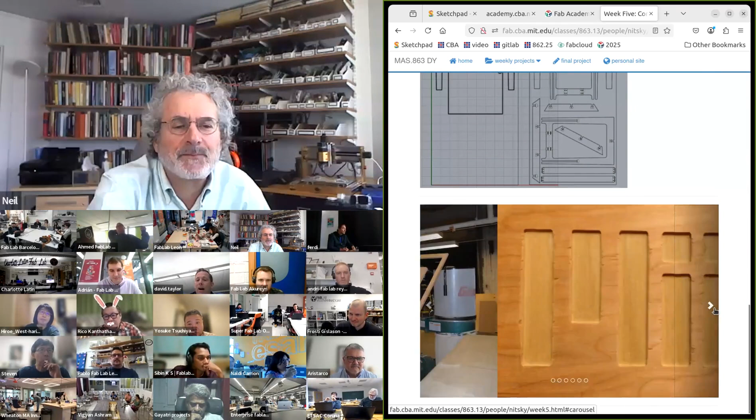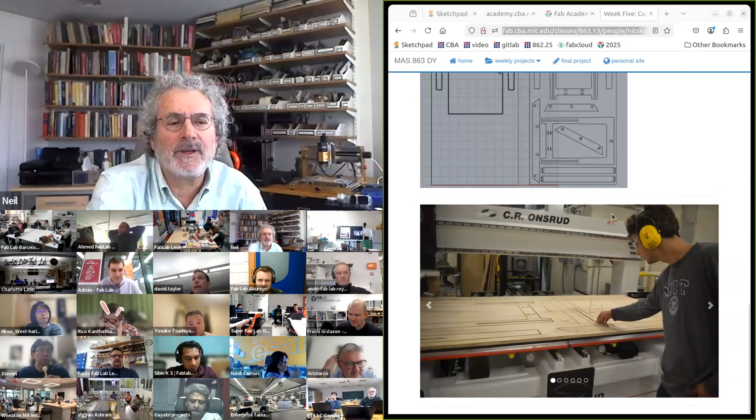so his girlfriend wanted a standing desk, and here she is with it. And let's see, I'll update that link. But this is a classic assignment for the week, starting from the sheet stock and cutting out all the parts to make the desk. This is nicer wood than you'll likely start with. But that's one example.

In that lineage, Open Desk is a platform for open furniture. Here are lots of examples. AtFab is another platform. So those are examples of furniture, and then it can get bigger. So this is a project making rapid shelter for things like emergencies. This is a project a colleague made using the tool you're likely to be using to make a whole house for the Museum of Modern Art.

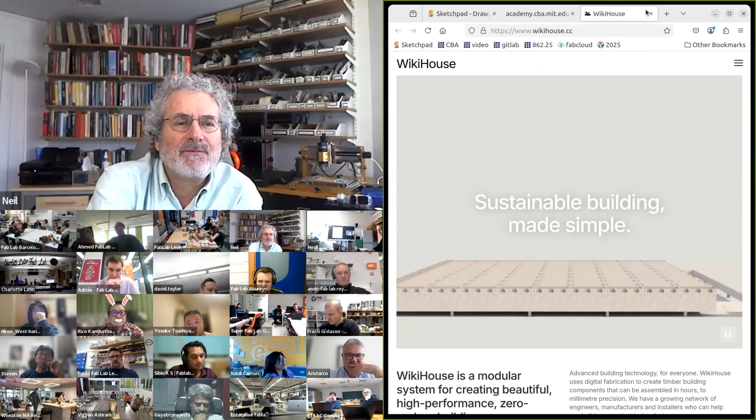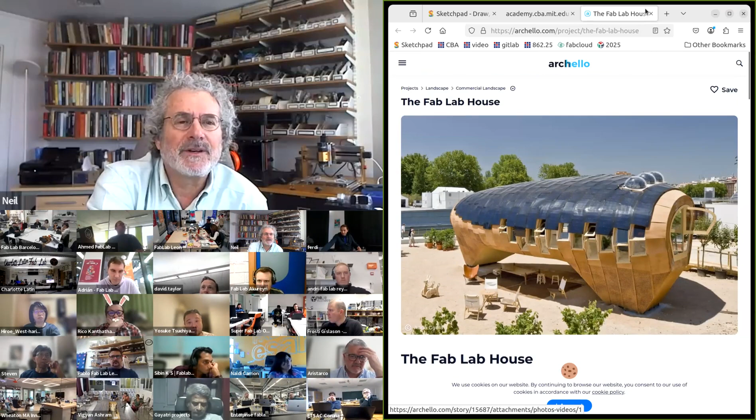WikiHouse is using these tools to make full-scale houses this way. This was a small house made as a Fab Lab project. And then this was the biggest Fab Lab project ever. This is a full-size house made, including all the furniture in it, all using the skills we're going to cover this week. So you won't be able to make a house this week, likely. Well, maybe a tiny house, but it's just using more of the skills we're covering. So start with the tools. On the smallest size, this is a machine made by a former student.

And a router cuts out 2D shapes, but this has computer vision, and so you do the coarse motion and it does the fine motion. This isn't good for making giant things because your arms can't reach, but it's good for making fine parts.

And in particular, what's great about the Shaper is with all the other tools, you bring your stock to the tool. With the Shaper, you can bring your Shaper to the stock. So you can engrave in a floor. You can bring the tool to wherever it's needed. So that's the smallest tool.

Maslow is an interesting offshoot. This, instead of having a big gantry, has tendons. And so you have anchor points, and then the tendons pull this head around. So instead of a giant machine, you anchor it on the stock.

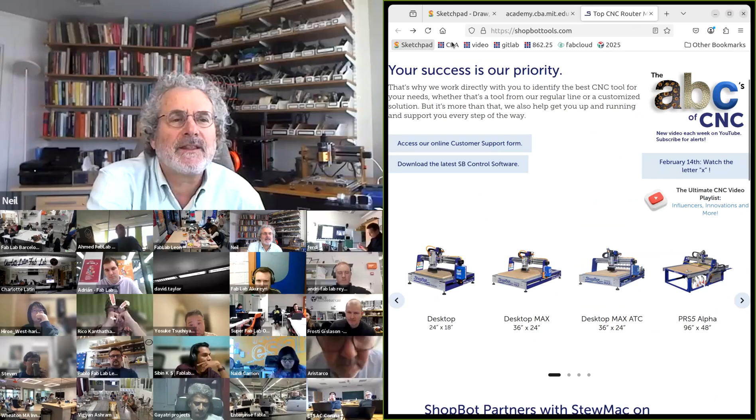And then the classic machine for this week is a ShopBot. This was founded by a colleague who works very closely with the Fab Lab network. And so a classic ShopBot is 4 feet by 8 feet. They can be both open and closed loop, and I'll talk about that. And so these are in the range of $20,000 to $30,000. And they're fairly stiff, but they're bolted together, so you have to periodically readjust it.

Then a machine like this, the Onsrud, this goes from $20,000 or $30,000 to, let's see, their site's not loading, but $100,000. And the difference between the ShopBot and the Onsrud is they can basically do the same thing. The Onsrud is much stiffer, and so you can machine more aggressively and more continuously, and you don't need to periodically readjust it.

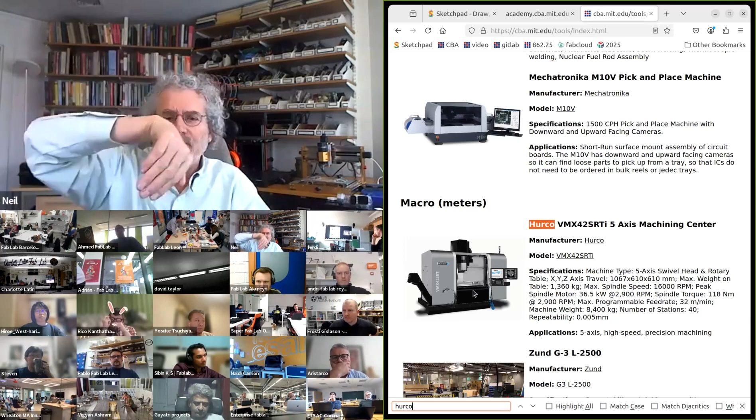Then there are tools like Haas or Hurco. And so, let's see, this is a machine tool in my shop. This cost about $300,000. And it has a fairly large work volume. It can move in 5 degrees of freedom. So it moves X, Y, Z. The bed can rotate and then the head can rotate.

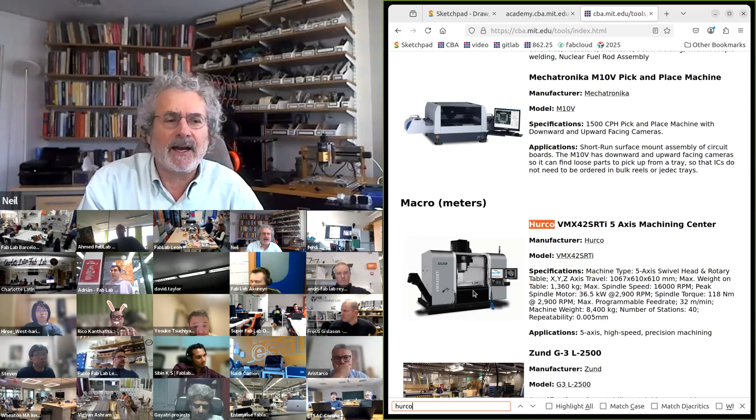But this is much, much stiffer. So the ShopBot can do light metal like aluminum or brass. The Hurco can do titanium and stainless steel at high speed. But you need a much stiffer machine and a much heftier spindle.

Then while we're touring machines, the Zund like this, that came up today at the Kerala Fab Lab. The Zund, depending on the model, is maybe $100,000. And so it's got a very high-speed machining spindle that's very accurate, that it's laser trimmed. But what makes this one special is there's a moving vacuum bed.

And so you can work over a large area quickly, and you can machine, and you can also cut with heads that roll or punch or shear or cut. And so this is used for high-end advertising displays, for race car composites, for luxury leather goods, or all sorts of unusual uses of this giant flatbed cutter.

And then a really interesting machine you'll hear about in the machine building recitation is Jens in Norway has been making machines that are, let's see, we want to go to the Humphrey. This is a machine on the scale of the primary machine for this week, but this is an open design made in the lab, and in particular, most of the parts of the machine are made on the machine. And so he's made a series of a parent machine, a child machine, and a grandchild machine.

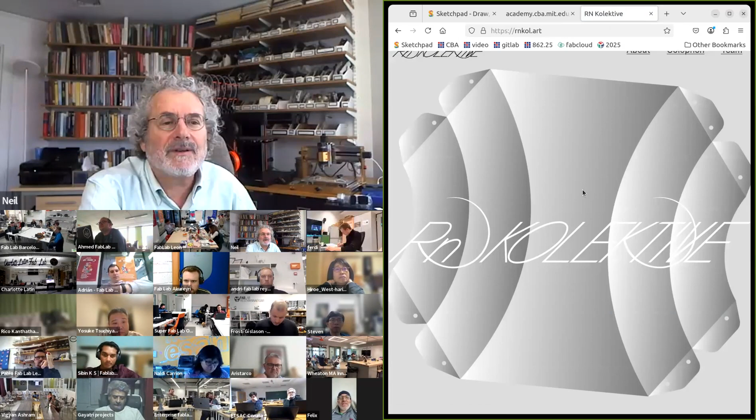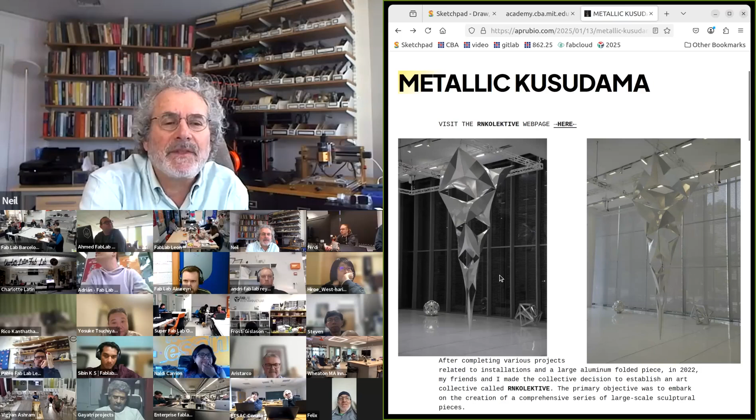Let me take a look quickly to see if I can find it. Oh, great, I found it, and I'll add a link to this. So, one of my students, let's see, that's not loading properly. So let's go back to here. So these are art pieces, the size. Okay, oh great. This is the picture I wanted.

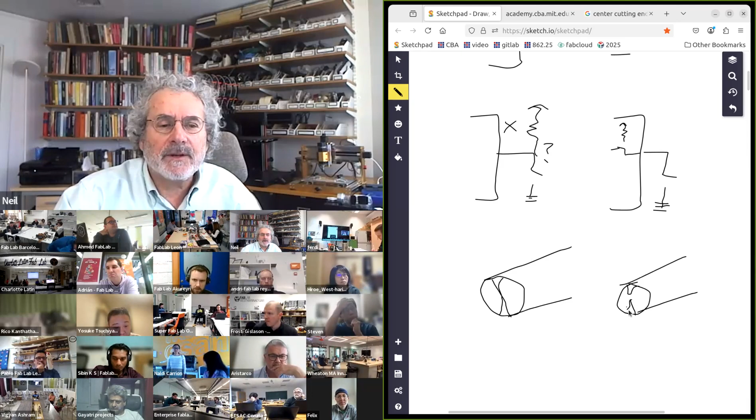Then the next distinction is, if you look at the tip of the end mill, if you look at the front of the end mill, actually, yeah, this is a good image. Actually, that's a little confusing. So if this is our end mill, and then we have the flutes, there's 2 different kinds. In one kind, they don't meet at the middle. The other kind, they meet at the middle. This kind is called center cutting because you can go down as well as over.

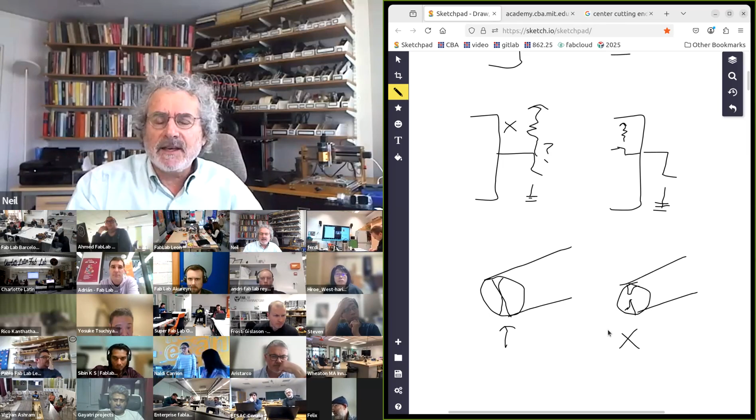This kind is not center cutting, and so you can't plunge with it. I'll talk about how you use it when I get to the toolpath. Non-center cutting does a better job of removing chips, which is why they exist. Center cutting lets you plunge. And so typically we are always using center cutting end mills. Yeah, Ricardo is noting there is a matrix of which coating works with what material, which is why there's multiple coatings.

The next thing you need to pick is up versus down cut. So here's a sheet of plywood. If you're milling with the end mill, and if the spirals are going this way, when the tool turns this way, it's trying to lift up the top, and so you pull up an edge on the material. If instead the flutes are going this way, here's the end mill turning, this is pushing down, and so you get a clean surface on the top. But the problem is there's nowhere for the chips to go. You're kind of pushing them into it.

It's the opposite at the bottom. This one at the bottom gives you a clean surface. This one at the bottom will be ripping the surface out. So a common thing to do is you can start with a shallow cut with a down cut end mill. And then once you have that, you finish it with an upcut end mill.

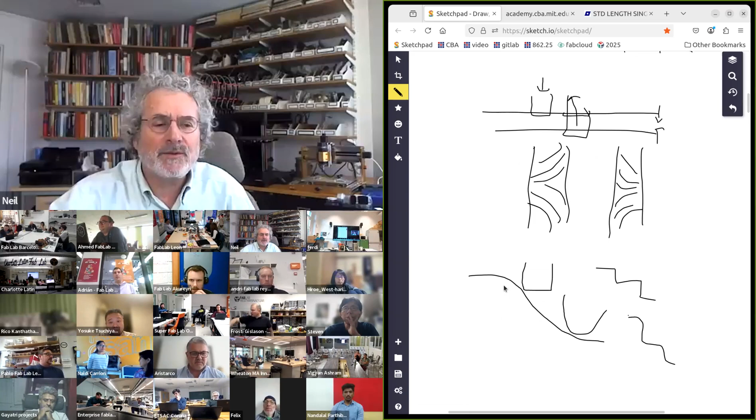But a more important difference is if you need to get into a pocket, the flat end mill might hit the edges where the ball end mill can get in. And so ball end mills tend to get used for finishing cuts for smooth surfaces and getting in for finer features. And then in addition, there are a number of other specialties like extra long end mills that can get into a narrow pocket, but these you have to go very slowly because they bend easily.

And then there are tapered end mills that can make a fine end cut, but are stiffer. There's tiny end mills for the littlest features. And so there's a huge range of tools. And so part of this week is going to be picking out the tooling. Yeah, so the flat, sorry, Stephen, what's the question? A flat bottom end mill is best at making flat surfaces and at chip removal.

So a big part of this week, one part is picking the tooling. Then the next task for this week is what's called speeds and feeds. So this is a Bible of machining called the Machinery's Handbook. And let's see, another site loading slowly. Hopefully that'll load. This is a handy book you should have in your lab by your machine tool. That's a really good reference.

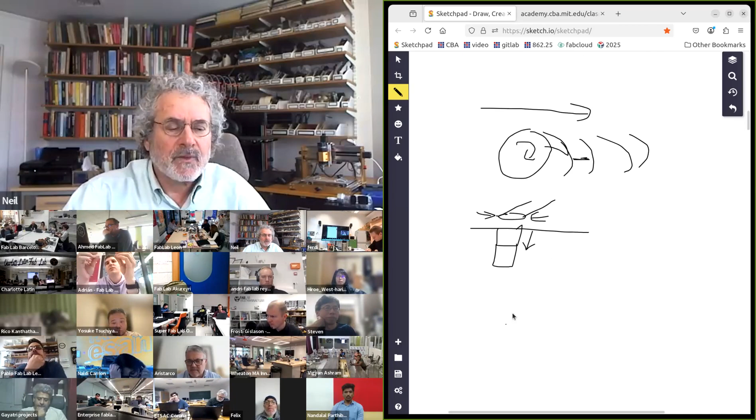Then the step over is, let's say this is the edge we want. If the tool goes on this path, and then the next one goes on this path, from the side view you'll get a little bump at the boundary between them. And so the step over is how much you overlap succeeding passes. And it can range from 0 for rough cutting to 90% for very smooth finish cutting.

Lubricants, you're not likely to use this week. So when you machine stainless steel at high speed, there's typically a lubricant, and it's doing two things. One is it's helping lubricate the tool, helping it move. The other thing is it's helping remove heat from cutting. You don't use lubricants with wood. You don't typically use them with plastic. And for light metal machining, you don't need them. But for heavy metal machining, you use lubricants.

Then an interesting thing you can do is, this is abrasive grains. You can use them in a slurry to machine hard material. And then you can get, again thanks to our friends in Shenzhen, these surprisingly affordable diamond impregnated bits. And these cut hard materials, not by a flute making a chip, but by grinding away little tiny particles.

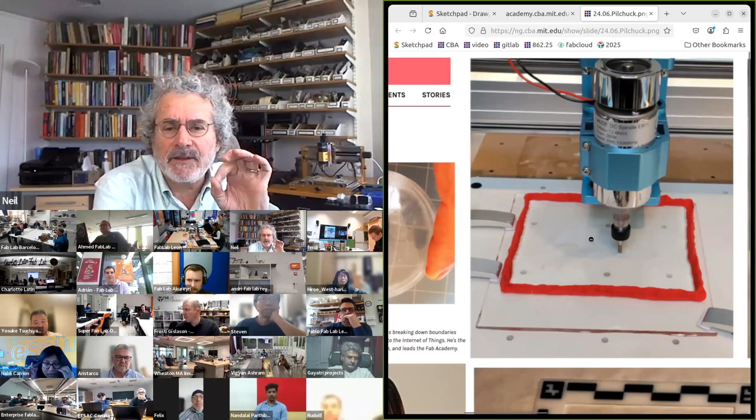And the reason it's there is when you use the diamond bit, you need to cool it, but also the fine particles are hazardous to breathe. And so here the puddle suppresses the particles made by the grinding. And what we're doing there is we're actually plotting in glass. We're machining 3D surfaces in glass that you can't do with an end mill, but you can do by machining with a grinding bit.

Okay. Next comes fixturing, and this is surprisingly non-trivial. So if you want to buy a vise, not a visa, a vise, a simple bench vise might be $10 or $20. But if you want to buy an NC machining vise, let's see, an NC machining vise might be $1,000. And so the $1,000 vise, compared to the cheaper vise, has much flatter surfaces that are smooth, flat, rectilinear, stiff. Oh, okay, yeah, toolmaker vise.

So for precision machining, you can use a machining vise. For simple machining on a large format tool, you can use bar clamps. So these are just handy clamps to clamp it down. But you can't use those for big areas, because if you use a bar clamp and you clamp it at the ends, nothing is holding it in the middle when you machine. And so you need to distribute the holding force.

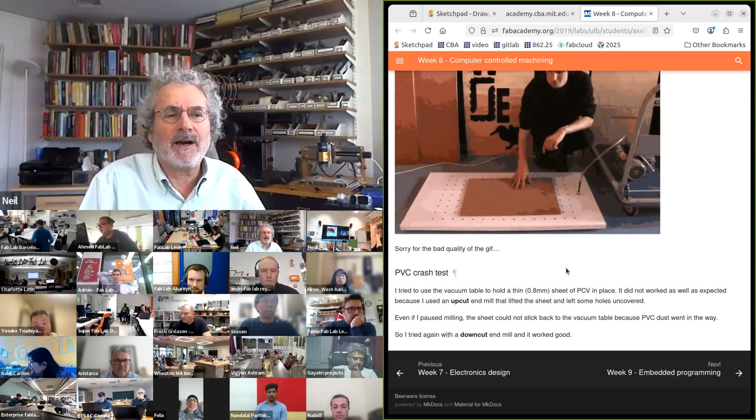You can use a vacuum bed. This is a project where somebody made his own vacuum bed. And so here the vacuum holds it down. In a job shop in production, vacuum beds are preferred because it's much quicker to get the material in and out. The only limitation is they need some maintenance. The holes get plugged, so periodically you need to do maintenance on the holes in your bed. But production tools use vacuum beds to distribute the holding.

When you machine wax to make molds, often we use a bead of a glue gun to hold it, and then you just crack that to take it off. And for the most complex machining, where you're going to machine with all 5 axes, one of the interesting ways is you take a piece of metal you want to machine, then take a low temp metal that's kind of like solder, and you cast your metal in the low temp metal. You put that all in your machine, machine through both, and then melt away the low temp material to take your part out. So there are a lot of options for how you fixture. But typically we use screws or these sacrificial nails to distribute the hold down.

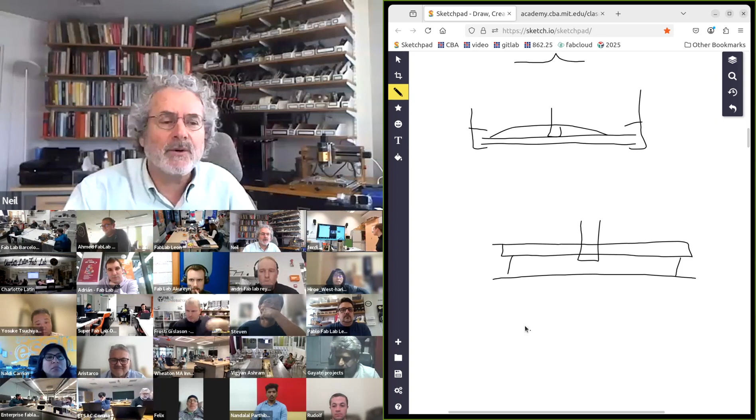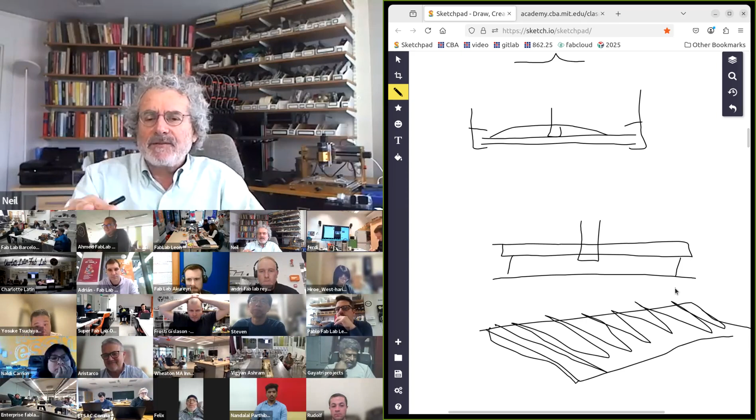So next up is, what does the nail go into? You have the bed of your machine. You have your stock, which is going to be machined and turned into a piece of furniture. In between those is a sacrificial layer, and you cut into the sacrificial layer. So if this is your large machine, periodically you put the sacrificial layer on it, and then you run a long job where you go back and forth and machine the whole sheet. You want the sacrificial layer to be flat in the coordinate system of the machine. So you machine the sacrificial layer smooth and flat, and then use that to hold down your sheet. Depending on how often your machine is used, somewhere between months and years, you replace the sacrificial layer when it's used up.

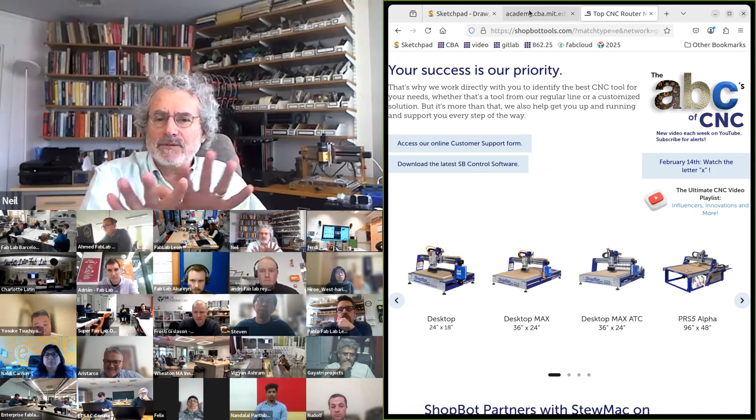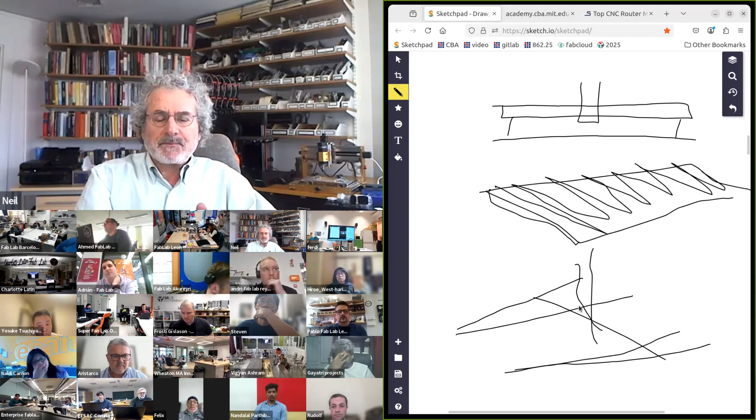Then the other thing is, if you look at a tool like a ShopBot, it's bolted together, and over time the bolts drift a little bit. So to exaggerate, we have the rails on the side of the machine that the carriage travels on, but they might not be parallel. They might be converging or diverging. And we have the vertical axis of the machine, but it might not be quite vertical. What that means is when you cut out a square part, it might not be quite square. So periodically you need to run a test job, make a test part, and check that when you send a square part in, it comes out square and the dimensions are right.

Then when you're machining, you're making a lot of dust, and I'm going to talk about that for safety. You need to collect it. And so there's a boot on the machine that's vacuuming up the dust, taking it to a dust collector. It's noisy. You typically want ear protection.

If you see dust coating surfaces in your lab, it's a very bad sign. You don't want to be breathing it. You don't want to distribute it through the lab. When everything is working properly, the dust goes into the dust collector. If you see dust not getting collected, something's wrong, you need to address it.

So then one of the questions in the chat, this is now the answer to it. You're going to start with a flat piece of wood. This is called a flexure, where you make lots of little beams, each that can bend a little bit. And by doing that, you can start with a rigid flat piece of wood, but make something that bends. And your ability to do that does depend on the quality of the wood. These aren't great in OSB because it's chunky. This works better with smoother veneer wood.

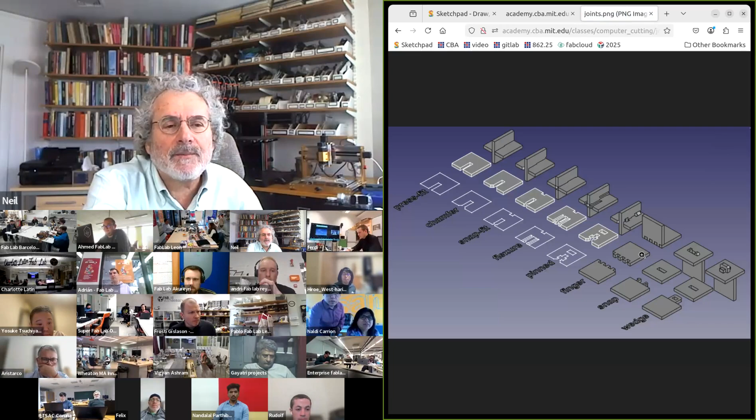This is a poster of types of joinery. And so in laser cutting, I showed you a few kinds of joints. In woodworking, again, there are hundreds of types of joints. If we go back to the laser cutting week, one of the nicest joints for this week is the wedge joint. So this last example here,

a wedge joint like this, the reason this is such a handy joint is you have the part that goes through, you put in the wedge, and you don't need to get the dimension right. You don't need to know exactly the thickness of your stock, because if it's a little thicker or a little thinner, the wedge will go in a little more or a little less. A wedge joint is a really nice way to handle the range of types of joints.

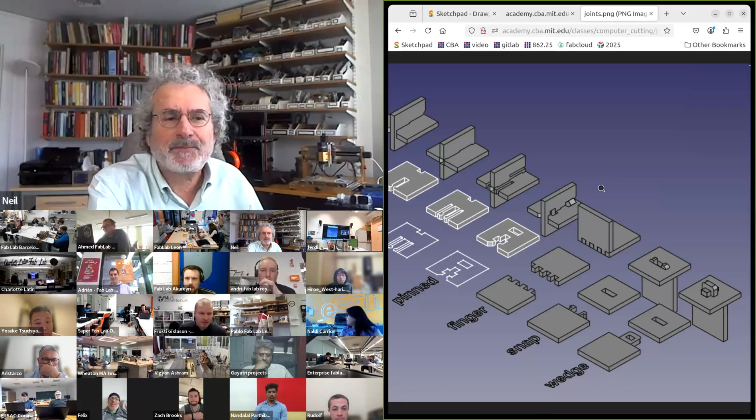Then once you have a joint type, there's a huge range of things you can do. So reciprocal frame construction is a joinery strategy where you take the joints and then you make these sort of structures out of them. These are called reciprocal frames.

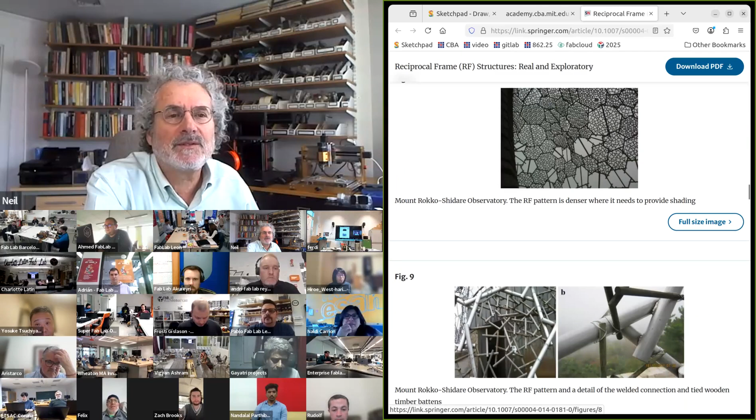Tensegrity is a really interesting idea where you have strings that are good in tension, you have beams that are good in compression, and there's no flexion, there's no bending. It's all a combination of tension and compression. And you can make what look like beautiful floating structures with tensegrity.

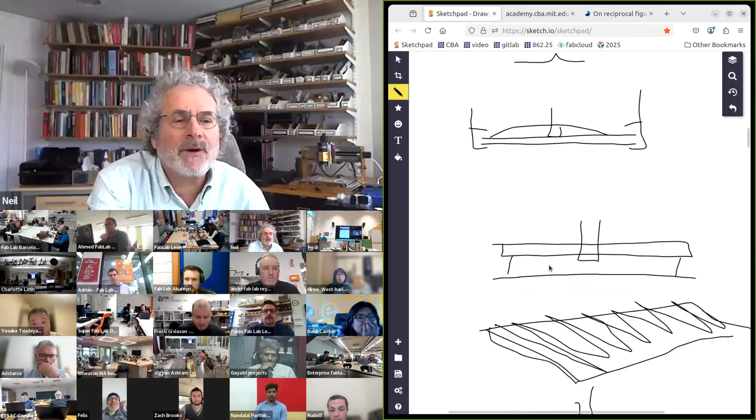And then the Maxwell criterion, this is a classic paper from 1870. And it's an important thing to be aware of this week. If you make, say, a bookcase, and this is the bookcase, it'll be very wobbly because it can shear like that. So instead, in the bookcase, you typically have a reinforcement like that.

And what's going on is you need to count how many degrees of freedom there are and how many constraints there are. And if there are more degrees of freedom than constraints, it's a mechanism and it can move. And so you need to add constraints so that you don't make a wobbly structure. And so that's called the Maxwell criterion.

Okay, so now we have our machine, we have our stock, we have our tooling, we have our fixturing. Now we need to make a toolpath. So, terms: we've already seen kerf, the idea that the tool has a diameter, and so we need to offset by the tool diameter to get the right shape.

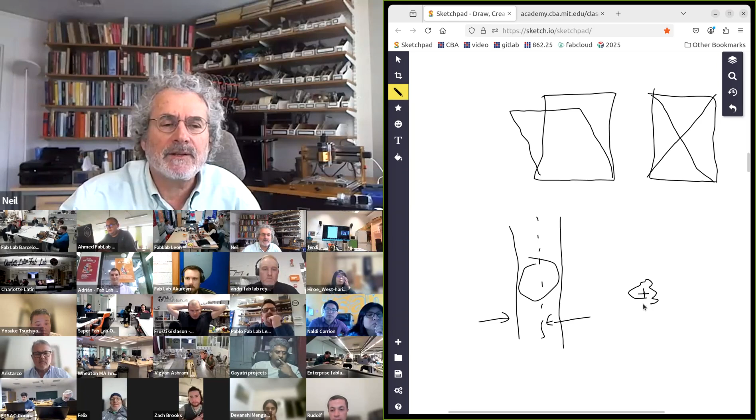In addition, another important concept for this week is runout. Runout is because the tool might not be perfectly vertical and the bearings might not be perfectly vertical. If this is where you place the tool, it might meander a little around it. And so this is the diameter of the tool, but the actual cutout you make is larger because of the runout of the tool. And you need to know that in the design.

Then the tool can either go this way or that way. This is called climb machining because it's trying to climb over the stock. This is conventional because it's pulling into it. Climb makes much more force on the machine, but it leaves a cleaner cut. Conventional, the spinning holds the tool against it, but it leaves a rougher cut. So it's common to use conventional to start and climb for finish.

Then rough cutting is where you cut quickly in layers, and then finish is where you move all the axes, and that's rough. And here's finish making very fine steps. And so depending on what you're doing, there's rough and finish cutting. Then there's a whole list of high-speed machining, dry, ramping, adaptive, swarf, rest, trochoidal. These are more advanced strategies.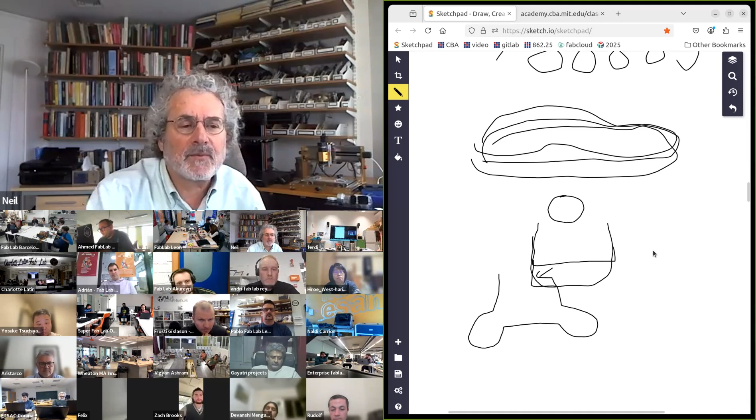Then the next thing you need to worry about is the tools we're using might be, say, 1/4 of an inch. So let's say you want to make a joint. If you use a tool like that, it'll be shaped like this. And if you want to have a part that comes in here, it's going to get stuck there because of the shape of the cutout. And so we make things that look like this. Sorry, let me do that with more room. So if you cut out a shape like that, a part coming in here can go all the way down because we made this extra space. So T-boning or dog boning gives you room for joints.

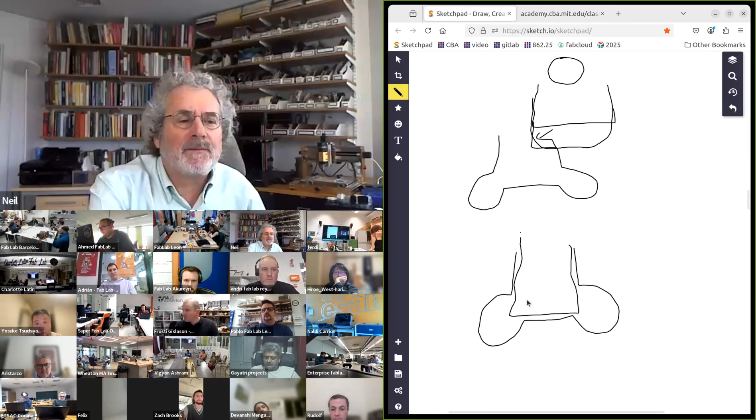Next thing you have to be aware of is there's the tool. It has the flutes. Typically, there's a shank on the tool. Then it goes into a tool holder, and then this goes into a spindle. Any one of these can collide with your part, so you need to make sure there's enough room for the tool to get in.

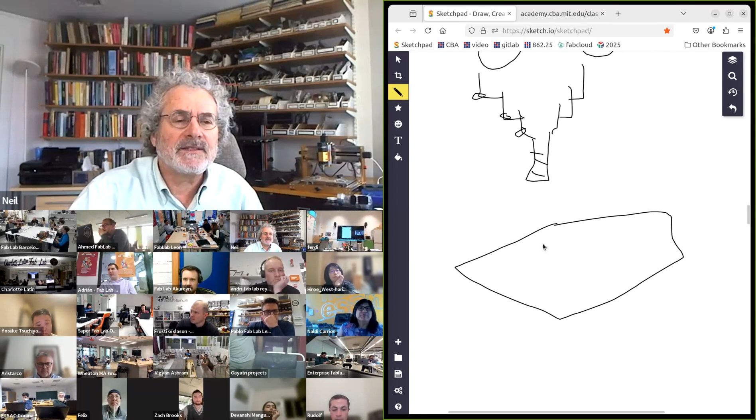Next issue is, let's say here's our big sheet, but let's say we're cutting out in our sheet a small part. When you get most of the way around cutting it out, there's nothing holding it, and it'll suddenly start flapping around. So one of the things you can do, looking above, is, if this is the part we want to make, you make little tabs you leave behind that hold it in place, and then you snap it out.

Or side view, another thing you can do is machine almost but not all the way through. And this gives you what's called an onion skin. And then, just like with a knife, you can trim it out. So tabs and onion skinning help hold the part in while you're cutting it.

Nesting is a key skill for this week. I mentioned this for laser cutting, and it's more important this week. Nesting is how you place your parts to make good use of your stock efficiently. You can do it by hand, and there are tools to automate it.

A very important concept for this week is, when you start cutting, you might have the axes wrong. You might have the units wrong. You might make mistakes in making the toolpath. So initially, before you actually cut your material, we cut in the air. You move the tool away from where you're going to cut, and you do your job in the air. Make sure it looks good. Then you go back and cut it.

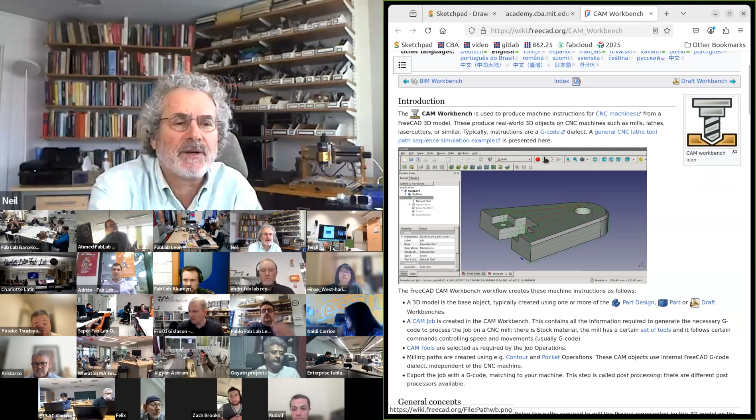So all of that goes into the CAM. For example, the ShopBot comes with VCarve that does a nice job of this. Mastercam, ooh, I'll have to fix that link. Mastercam is commercial software. FreeCAD has a CAM workbench that was limited, but it's been getting better. So an option is the CAM workbench in FreeCAD.

Then if you're using SolidWorks, there's SolidWorks CAM. And then I'd say Fusion has the most integrated CAM. So in Fusion, seamlessly you go from the CAD to the CAM. And then mods, we're going to see when we do PCBs, but mods can do basic toolpaths.

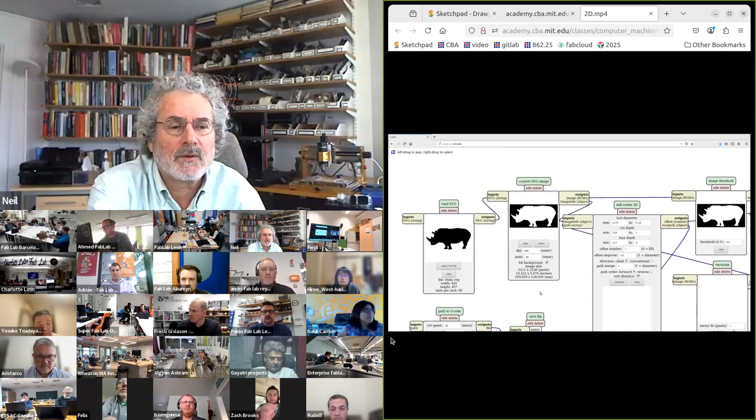So here I'm going to open a part. That did the 2D outline, and it's doing multiple passes for the cut depth. That produces formats, and I'll talk about the formats in a second. And then mods can also do, this is rough cutting a 3D shape.

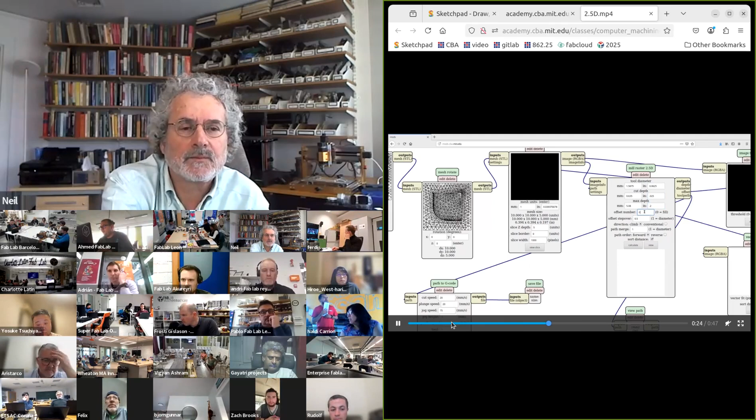So what it just did is it made a series of layers to quickly do the rough cutting. And then for a 3D shape, and I'll jump ahead, this is showing it's doing the finish cutting, moving all the axes with a fine step over.

For formats, ShopBots take their own format called SBP, and then G-code is by far the most common format. Most of the machines we're using take G-code. However, and there's a note in the chat, every machine is slightly different in the G-code, and you may need to tweak the G-code commands to match your machine.

Now we come to the safety story. This is a tragic article about a Yale student who was working on a machine tool. Her hair got caught in the machine and she died. When I was in grad school, I was working in the machine shop late at night with a fellow grad student. He literally looked over and said, "I'm bored," and then his finger was cut off.

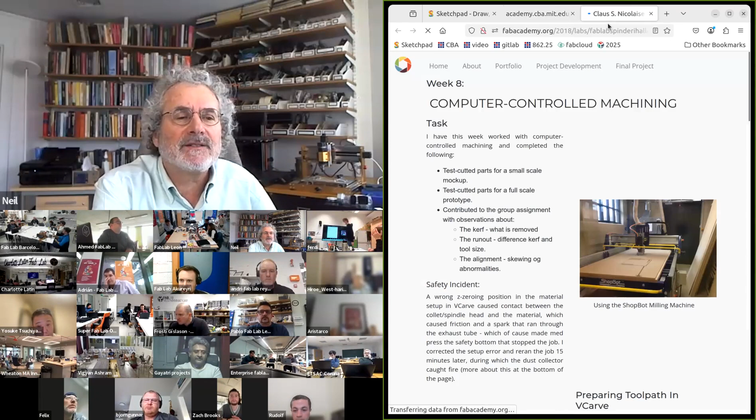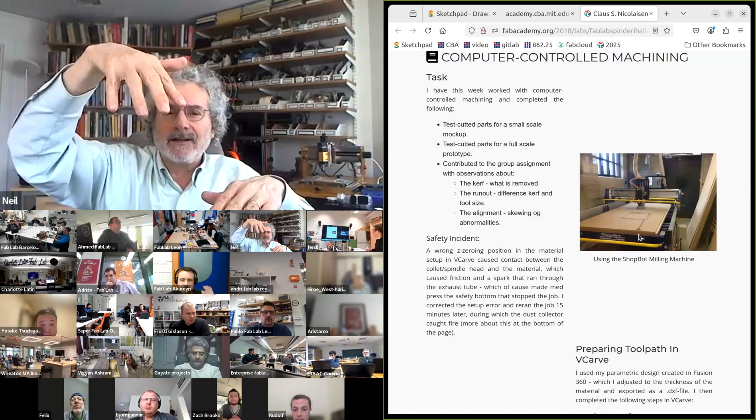This is the ShopBot at Spinderihallerne. They made a mistake. They didn't cut in air. They had the coordinates wrong. And when they cut, the machine cut really deeply, really fast. And they stopped the job. It was screaming. And they thought everything was okay. And then the fire trucks came.

What happened was when they made the mistake, they were machining so aggressively that the chips were glowing. They actually ignited them. And the glowing chips went into the dust collector. The dust collector was full of chips with airflow, and that was a perfect furnace. And so they ignited the dust collector. Once that happens, there's almost nothing you can do about it. So the dust collector was on fire, flames came out, and they had a huge cleanup and had to replace it.

Little end mills, when we make PCBs, when they break, we're just annoyed. These tools, if you break them, sharp shards can go flying at a high velocity. So you always wear safety glasses to protect your eyes. You don't want to have sandals. You want good shoes to protect your toes. You don't want any loose clothes. Your hair has to be tied up. And then depending on what you're handling, you want to wear gloves.

You want to always be looking and listening and smelling. When the machine is cutting well, there's a happy cutting sound. It's not quiet. Remember, you need to bite in. It needs to be working, but it's different from the screaming sound it makes when you're doing something wrong. Your hand is not a tool.